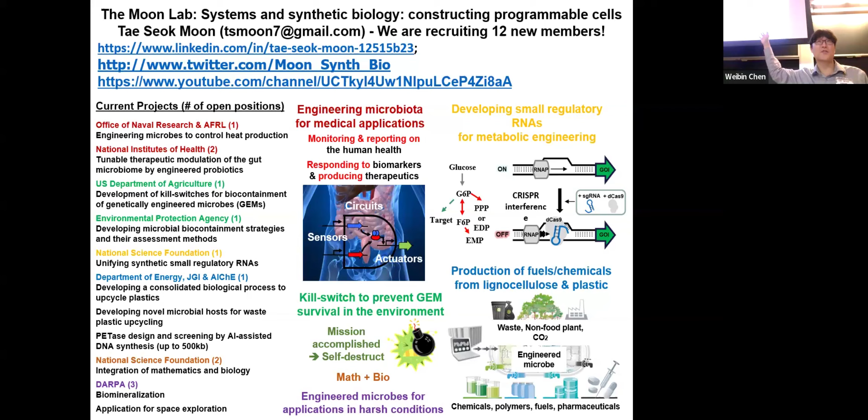So let me start with the serious talk. Even if you are not interested in the biology, you're probably interested in the global problem, including the climate crisis, energy problem, also pollution, etc. I'm very passionate about this problem, especially the global problem related to the climate. And I hate this guy because this is a waste, especially the plastic waste. That's a huge problem in the world.

But this actually saved my life because I talked about earlier my trip, more than 190 days a year, and without this one, I cannot survive. So I always have this empty bottle, fill it up with new water anywhere in the fountain. This is not actually recycled all the time. I cannot travel, but still the problem is too many bottles in the world produced every single day.

And what I want to do is, rather than using other methods, there are multiple different methods to tackle this problem, but I want to use a biological method using what I call magic bacteria that uptake whatever waste, including plastic or CO2, and also plant-based agricultural waste, into high-value chemicals. Today we do all kinds of different research, including CO2 reduction, also biomass, including agricultural waste or plant waste. But today I focus on the plastic waste because that's what I started the company based on, this technology.

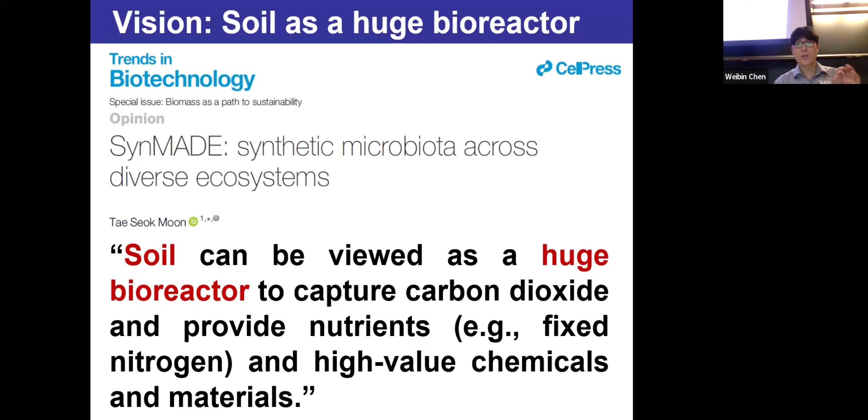So to make that happen, we need to have some tools. First I want to introduce this, especially for people interested in biology. Before, when we studied biology or a single microbe, what we did was basically delete one gene at a time and then understand the function of that gene. That's how we understand all the genes we have.

If you're not that into drinking alcohol, probably you don't have alcohol dehydrogenase, a key enzyme for breaking down the alcohol in beer or wine. The way we know is we basically delete that gene and then see you don't have any metabolism of alcohol. That's pretty much what we've done, but that's at a single cell or single strain level.

But can we do the same thing at the entire microbiota or microbial community level? Now we have a tool using the so-called CRISPR system. Basically you can use that as a targeted killer, meaning in an entire soil system or water system, you now have the method, approach, or tool to target only one bacterium in the community and kill only that one bacterium, then see the function of that bacterium in the society, in the community.

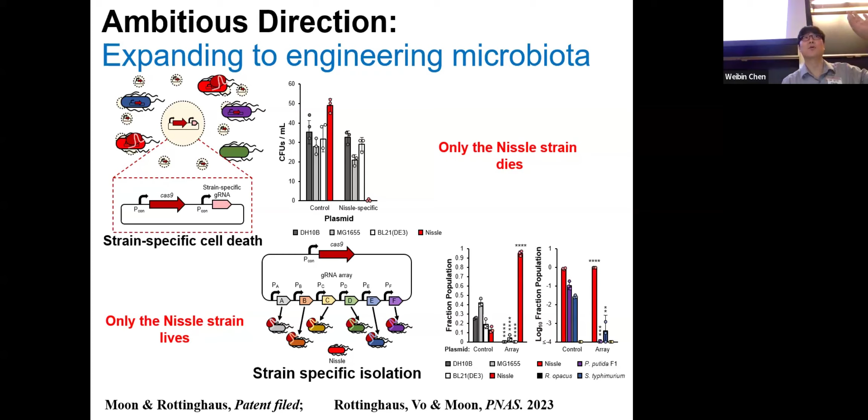So that is actually something we published recently, and we've kind of expanded the idea. Now we're using that technology on real samples—I'm talking about real soil, real water, etc.

So speaking about plastic, I have probably only 7 minutes, I guess, so I'll speed up. Basically this was my idea when I was traveling, and that was my shoe.

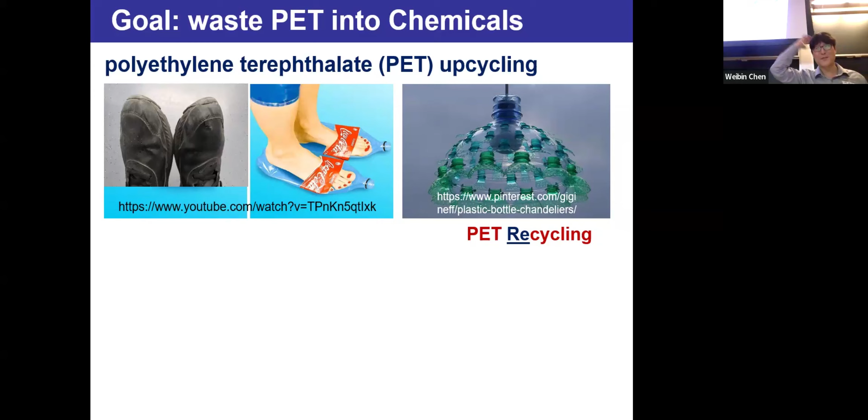After 71 days of non-stop travel—I'm seriously talking about 71 days without coming home, traveling to give 25 seminars 2 years ago—I found many holes in my shoe. I realized I probably wanted to recycle plastic to make my shoe at the time, but this is my joke slide; nobody laughed, unfortunately.

Anyway, so my project is basically not about recycling, but about upcycling. Upcycling means using waste and making high value out of it. As you can see, this waste probably costs very little, but it still costs some money.

But we are talking now not only about polyethylene terephthalate, PET, but we now have the technology to convert a mixture of PET, polyethylene, polypropylene, polystyrene—a mixture. The most important key technology that triggered me to start a company is that it doesn't matter, regardless of the composition of your plastic waste. Now we have the chemical method to convert that into smaller molecules, basically breaking it down, and then I have two magic bacteria converting it.

In terms of data, 100% consumption of the breakdown compound. But my lawyer said don't say 100%, even though your data shows 100%, you should say almost 100% because that's the legally correct term. So basically now, regardless of the composition of the original waste, we have technology that converts it into a high value chemical at the end of the process. This is very important because my plastic waste is different from your plastic waste composition—today's composition is different from tomorrow's. Because of that, we've solved the problem of heterogeneous feedstock, the inconsistency problem.

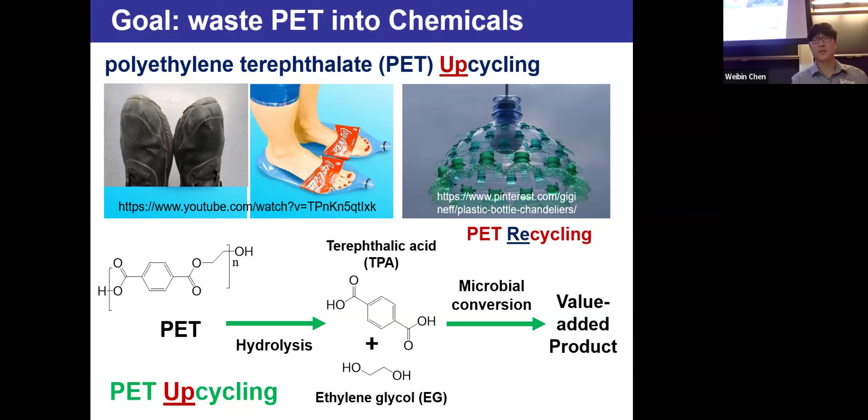So because of time, I'll move up very quickly. So I chose one chemical—a carotenoid.

There's one company doing a very nice job scaling up, making PET out of PET waste. This is a French company using enzymes to break down PET into monomers. This is not mixed plastic, only PET. They convert it into the monomers of PET, TPA and EG, then purify and repolymerize using chemical methods to make PET again. This is a very important recycling technology, and it's a huge market, as you can imagine.

But the only problem I see is the cost of this process—about $2 per kilogram. I checked with a company employee, and based on my techno-economic analysis, this entire process should be at least $2 per kilogram. How do you survive when the current PET price is only $1 per kilogram or less? The employee said, off the record, my calculation is right, but the way they survive is the French government giving a lot of money to the company. So this is a huge market, but economically it's not going to work. I want them to succeed, but it's not economically viable.

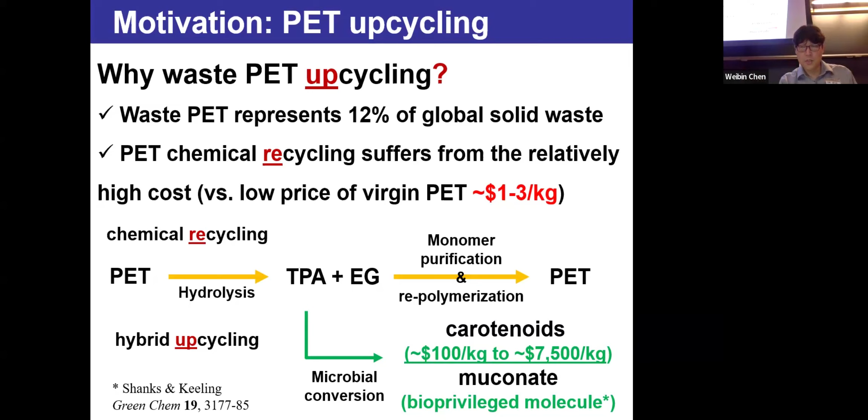So I want to completely disrupt this ecosystem by developing these compounds using plastic waste to make high-value chemicals, including lycopene. This is my concept—you don't need to worry about all the details since that's not your interest. The main idea is we now have the technology, as I mentioned, to convert plastic into high-value chemicals. Actually that should be shown in red, but the picture isn't delivering the right color.

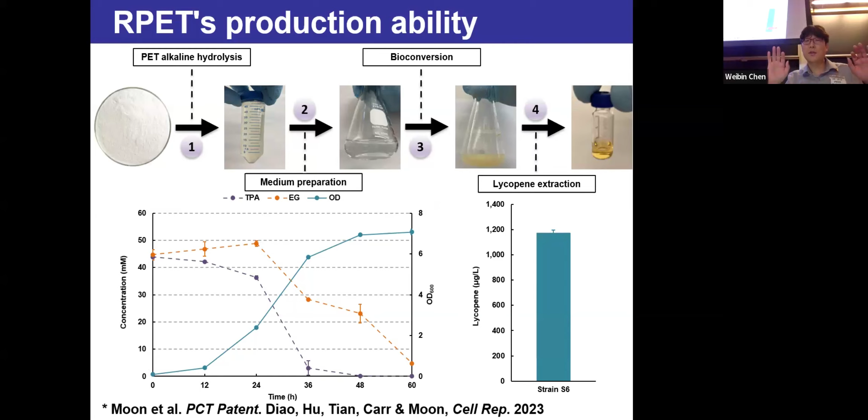The current titer used to be around 1,000 micrograms per liter. After multiple rounds of metabolic engineering, we now have around 20,000 micrograms per liter. That sounds like a lot, but unfortunately it's not commercially viable yet. This should be at least at the gram per liter scale to consider scale-up. We started from the microgram per liter scale all the way to 20,000 micrograms per liter—a 20,000-fold increase over a couple of years. I believe in three more years that will become 1 gram per liter.

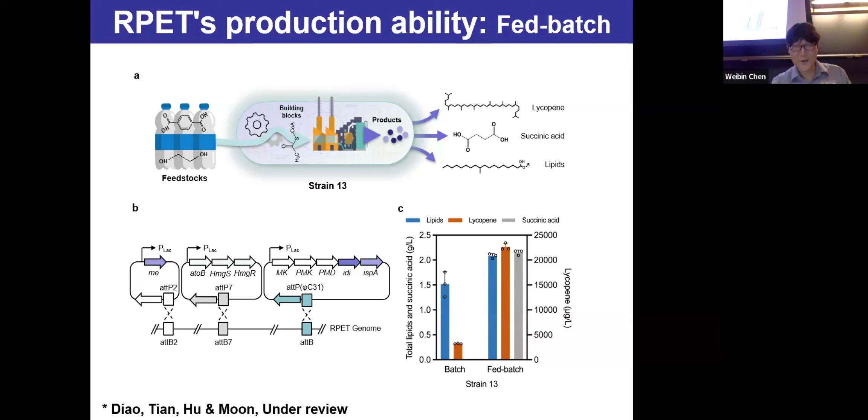If that happens, I'll sell my technology to a company, retire, get a mansion in California, drink a cocktail, watch the sunset, and be done with my career, I guess. Hopefully that happens—that's why my wife is so excited. I'm talking about California, right?

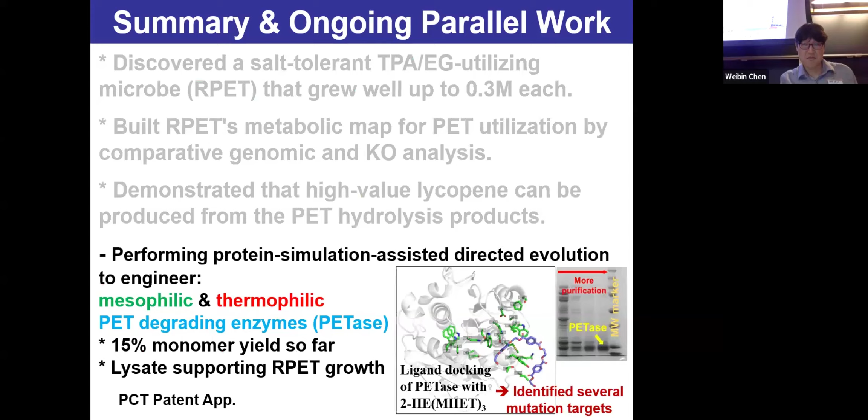Also, I want to talk about how I almost died for many years because of multiple reasons, including a policeman who beat me almost to death. I'm serious—that was sent by the dean of the school, Washington University. And then I survived. I realized I needed to do something for the community because I survived this kind of discrimination, harassment, and retaliation twice.

So three years ago I started a webinar series only featuring young speakers, untenured professors, or postdocs, giving them 45 minutes. But I realized nobody would watch that seminar series. So I invited big names, including Nobel Prize winner Frances Arnold, my academic grandma, and now 21 National Academy members, and also 23 funding agency directors.

I never thought about how many journals we have in my field—20 chief editors already joined as 5-minute speakers, as pioneers, and then 9 Nature and Cell journal editors, and as I mentioned, selected 165 rising stars. After 3 years of weekly webinars, I realized we need to gather together.

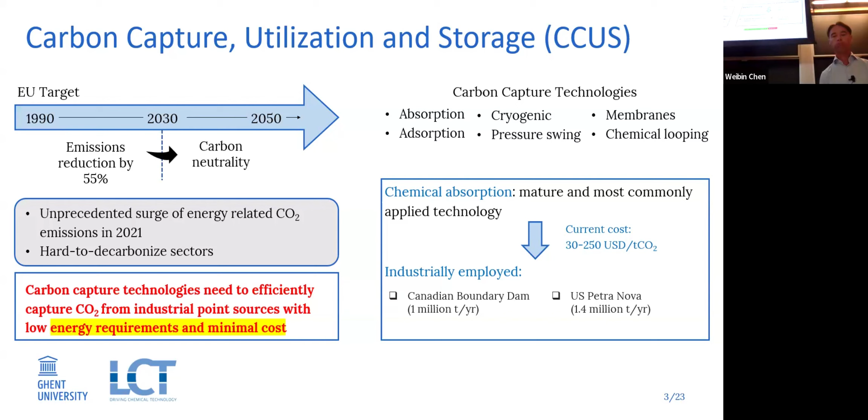Of course, you have different types of technologies. You have absorption-based, cryogenic, membranes, and so on. But people for point sources mostly look at chemical absorption as being the dominating technology.

How does that work? Well, you start with flue gases here on the left. You have some cleanup, and then they are sent to an absorption tower. In this absorption tower, we have an amine typically, a solvent in water that is basically trapping the CO2. This means you end up with a concentrated amine, which needs to be stripped. So here the CO2 needs to be removed, and that's done via heat primarily.

So the big energy consumer here is this reboiler. And in the end, if you look at the OPEX, it's mostly determined by this part. You see 70 to 80% of the OPEX is this reboiler duty. So if you can bring this reboiler duty down, then everything else makes sense.

On the other hand, from a CapEx point of view, these absorption and desorption towers are huge. It's like with everything in the chemical industry, you pay for steel. The larger it is, the more steel that you need, the higher the cost. So if we can make these things smaller, the cost will go down.

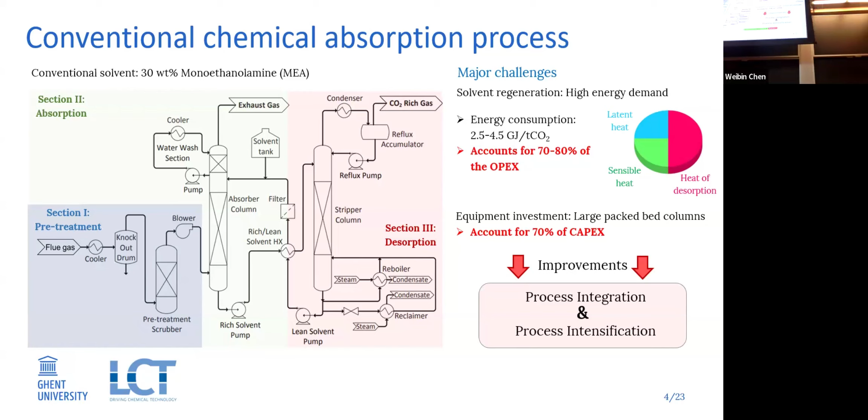There are a lot of definitions of process intensification, but I like this one of Professor Stankiewicz, one of the pioneers in process intensification: it's a chemical engineering development that leads to a substantially smaller, cleaner, and more energy efficient technology. In the end, doing less with more.

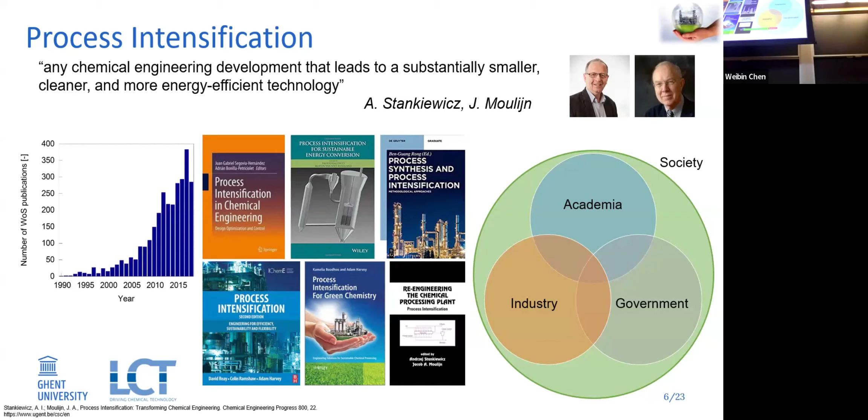See that you're not awake, it's more with less.

Good morning. So here you see our vortex technology. This is the first generation. It looks a bit like an octopus, and it was originally developed for gas solid kind of systems.

This is cold flow, just looking at the flow. Here you can actually heat things. This is for reactive purposes. We use it for biomass conversion and for catalytic processes.

With the solid, you really see the solid particles rotating very quickly because you have small openings in the sides, and here comes the gas in a tangential way, and it basically drives the rotation. So you see the gas flowing, and it's divided over these slits that you see here. In this way, you get this rotational movement, and then everything leaves over the exit.

So the main feature is that you get an intensification of heat and mass transfer. And the good thing is also you have no mechanical rotation. This is from a cost point of view, makes it easier, but also makes it more robust. And this is what we mean with process intensification.

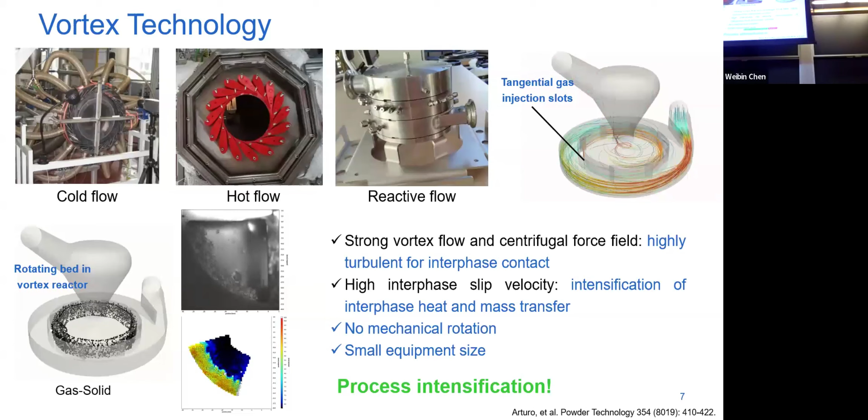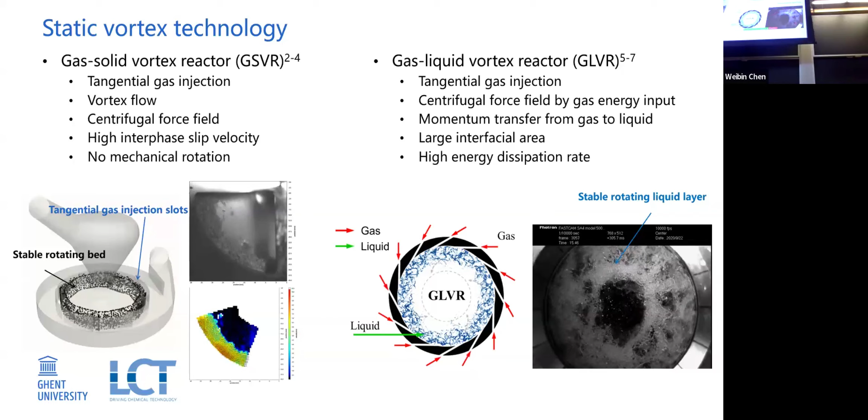So again, tangential inlet of the gas - these are the red arrows. The liquid is entered in the center, and is divided. And what you see - these are camera pictures - is you really get a very large interfacial area. So very high energy dissipation and very good momentum transfer. And this is, of course, excellent for absorption, but also for desorption.

And so over the years, we have developed this thing further. We see very high turbulent flow, intensification of the mass transfer. And again, we can avoid this mechanical rotation. We have optimized the design based on CFD - we did computational fluid dynamic studies to optimize the initial structure, and we have really very small equipment.

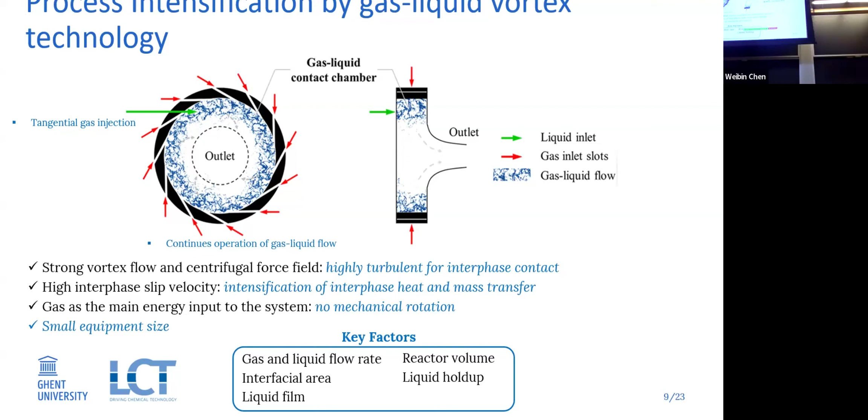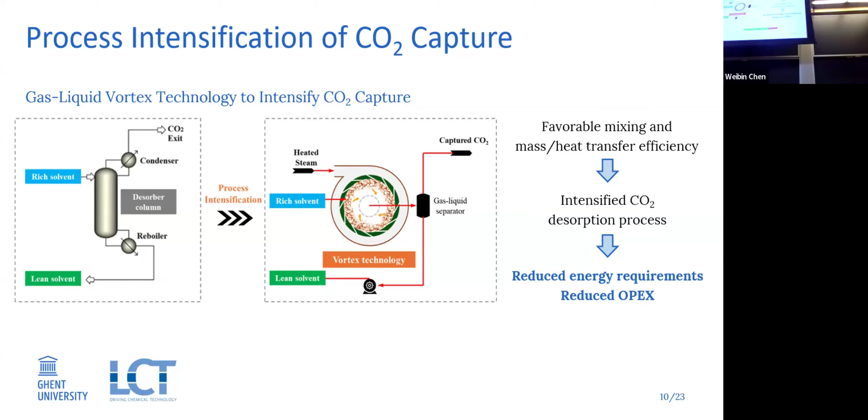But again, the crucial step is not so much the absorption, but really the desorption. So we have here our classical desorber, and here we have the vortex desorber. We have the solvent, the rich solvent which is entering, the steam needed for stripping the CO2, a gas liquid separator. Captured CO2 goes to the right, and here we have the lean solvent. So again, what we want to prove is really this reduced energy requirement, because this will reduce the OpEx.

So we studied this experimentally. It's nice to study things computationally too. So what we did is we have here our rich solvent, it's fat. We have a coriolis flow meter. We 3D printed a gas liquid vortex reactor. We put it in an environment with detectors, two types of detectors to double check our results, liquid samplers, but also infrared gas analyzers, really to be sure that we can measure the CO2 concentration at the outlet properly. And then, of course, we have our lean solvent, which is lean as well.

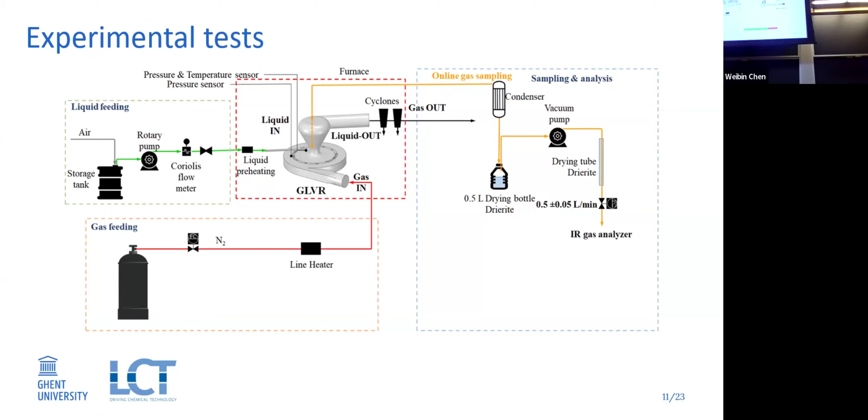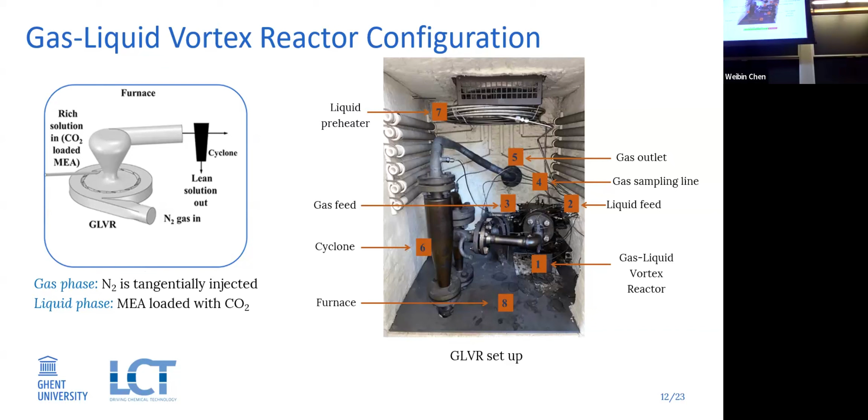In this small unit, we use a gas flow rate of 15 to 25 normal cubic meters per hour, and a liquid flow rate of 10 to 40 kilograms per hour. So with a device like this, you have this kind of high flow rates, and from that point of view, you really show the intensification potential.

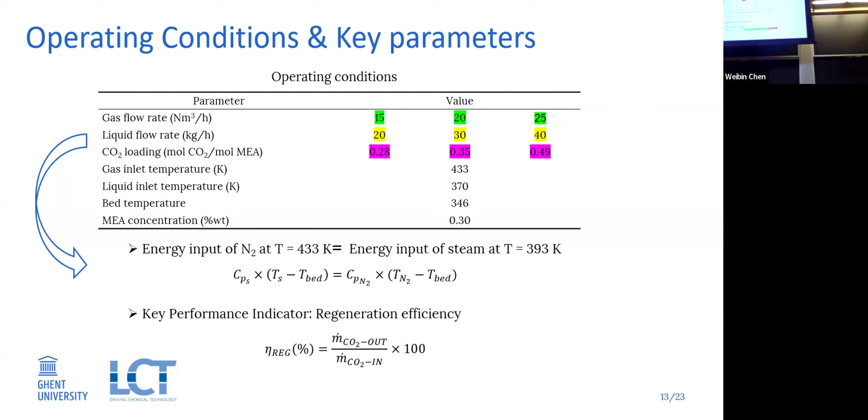We calculated energy input. Another performance index is, of course, our regeneration efficiency. This is in effect how much CO2 comes out versus how much CO2 we actually put into the liquid. So we want to, ideally, have 100% of the CO2 which is in the rich amine leaving. This, of course, is not always the case, it depends on the design.

So here you see the results of these liquid and gas flow rates with the same geometry, always kept the same. You see that we see a substantial influence of this gas and liquid flow rate. We see that for a constant gas flow rate, the regeneration efficiency increases with decreasing liquid flow rate. The energy input would remain the same, but the liquid holdup increases, so it's obvious that this becomes better. At best, we have a high regeneration efficiency of 74%.

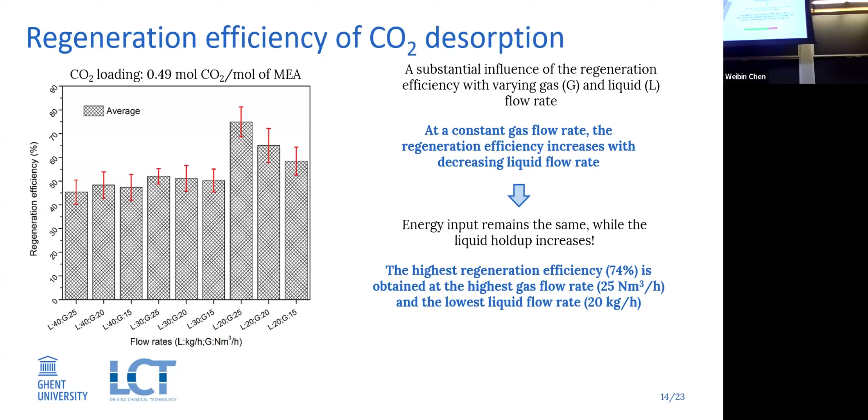So this is a very nice, decent value, also considering that we did not optimize the desorber design. We just used something that we had available.

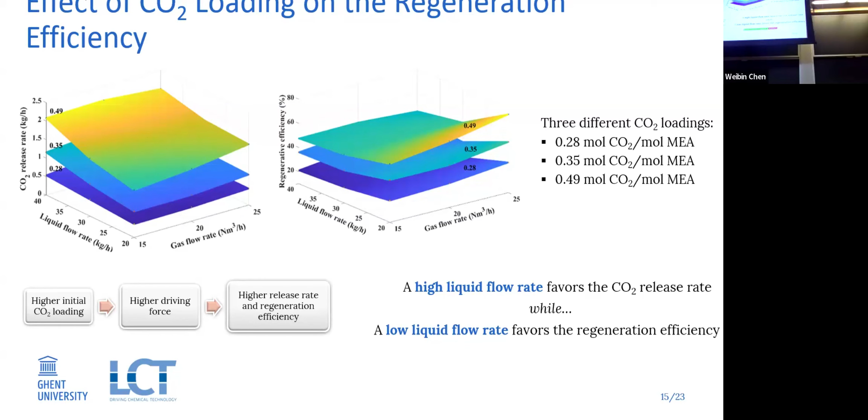So this shows potential. If you look at the three different CO2 loadings that we studied, then of course, if you have a higher initial loading, you have a higher driving force, and we have a higher release rate. So we go up in this direction. At a high liquid flow rate, this direction favors CO2 release rate, while a low liquid flow rate favors regeneration efficiency. So we have a bit of an optimization target that we can play with.

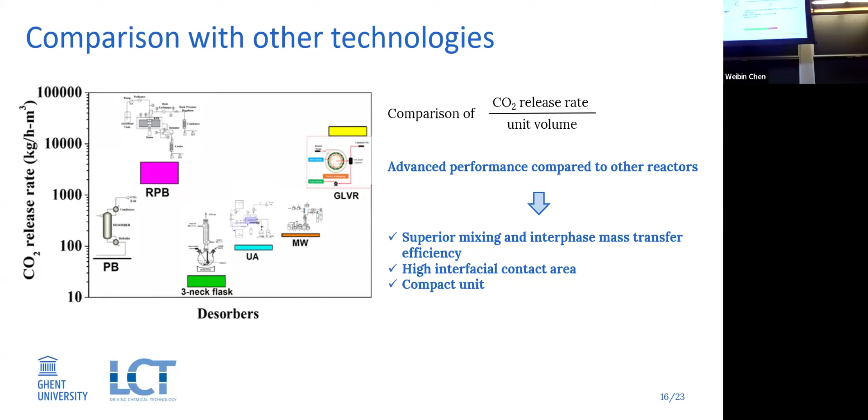And of course, then you get interest from companies and so on. So this is where we are today, a lot of interest from companies. And now we have to demonstrate this combination of absorber and desorber on a larger scale, at least showing that it's also possible at the higher flow rates.

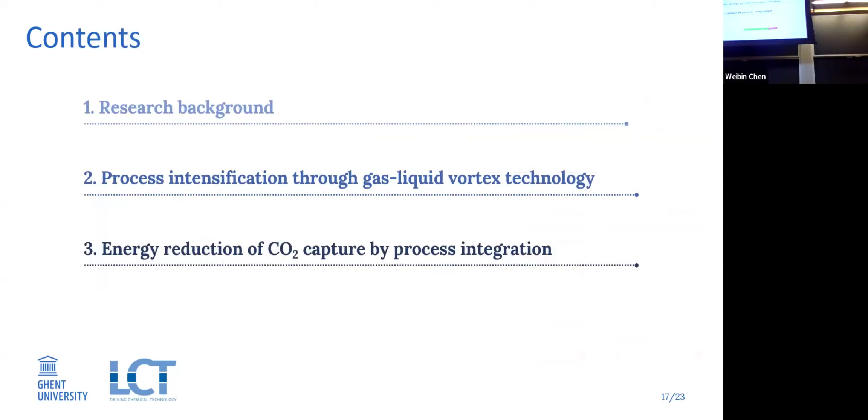But it doesn't stop there. What you can also do is not so much on this absorber-desorber, you can also play with the process scheme. So a classical process scheme of an absorber-desorber has this heat exchanger in the middle, this reboiler and so on. You can also do clever things here to reduce capex, opex, but in the end, to reduce this reboiler duty.

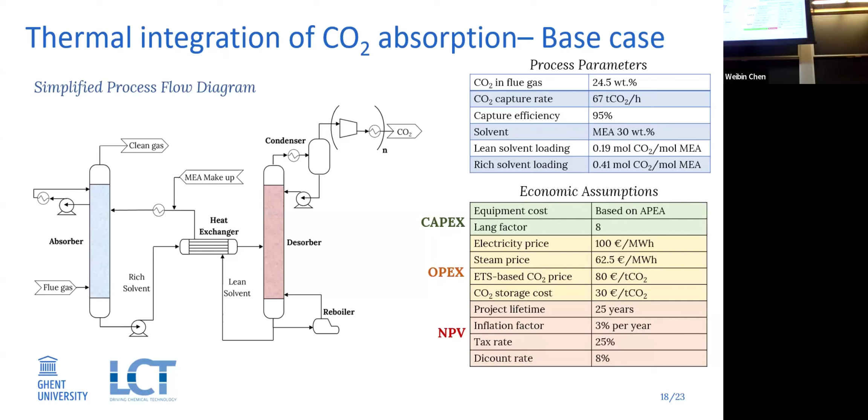We did a whole study looking at capex, opex, and NPV for a classical absorber-desorber combination with MEA, because MEA is typically the solvent that is studied best. We looked at a whole range of modifications. So the first one is this: intercooled absorber.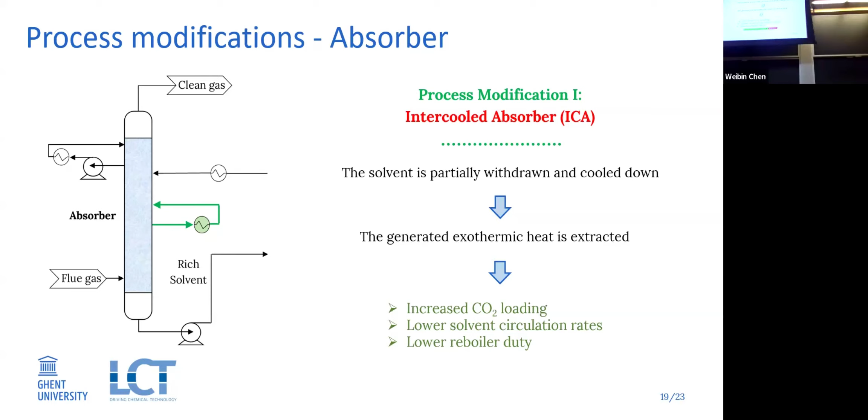Of course it costs a bit of capex, but the solvent is partially withdrawn and generated exothermic heat is extracted. This results in increased CO2 load, lower solvent recirculation, lower reboiler duty. This is always our objective. This is the first thing we studied.

The second thing we studied is rich solvent splitting. So we split the solvent partially, send it to the heat exchanger, but also to the top. The cold stream is fed to the top, reducing reboiler duty.

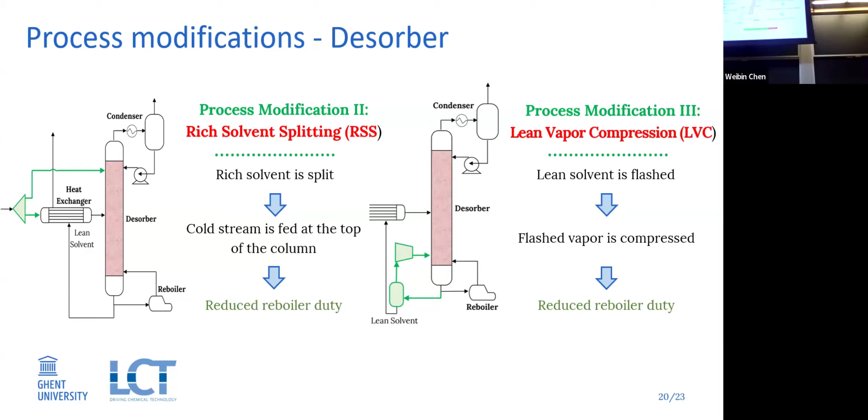The third one that we studied is lean vapor compression. So we have a lean vapor, solvent is flashed, vapor is compressed, reducing reboiler duty.

The fourth one is rich vapor compression. Rich solvent is in this case flashed, vapor is compressed, reducing reboiler duty.

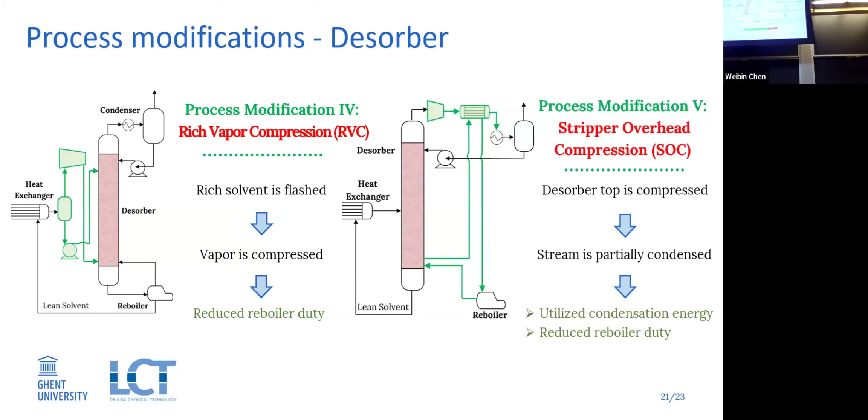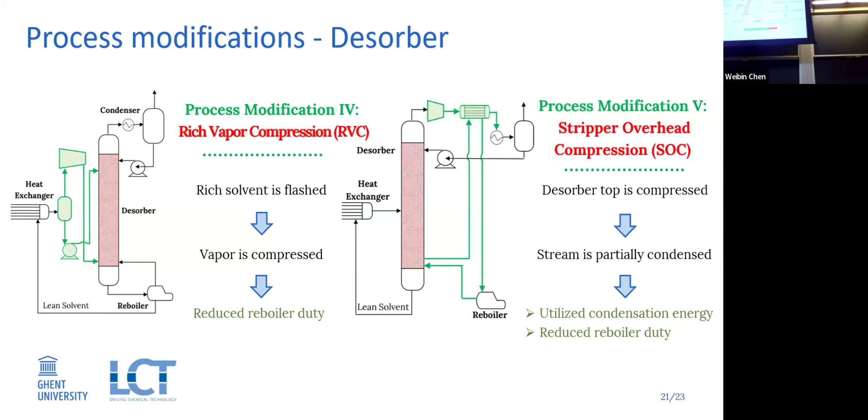Then the last one, stripper overhead compression. Desorber top is compressed, the stream is partially condensed with less condensing energy, and we reduce reboiler duty. So all these things are possible, but they all require a bit of investment.

But what you can see is that they have a substantial influence on reboiler and condenser duty. This is the base case, and you see that especially this lean vapor compression can result in a 21% reduction of reboiler duty. You also see that intercooled absorber gives about 9%.

You also see that sometimes this will result in a bit more electricity use, which is why you also have to look at OPEX and CAPEX. You see that in the end, for the LVC, this still results in a lower OPEX. Nevertheless, there's a CAPEX cost for this.

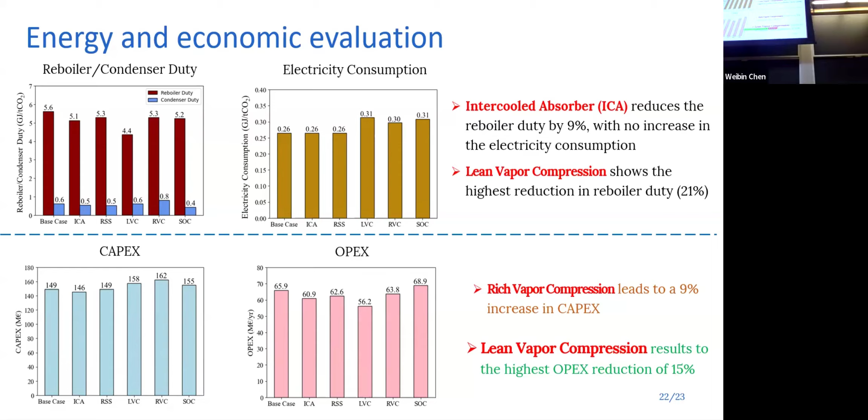So you see that all these different changes in the process can really help to substantially decrease the OPEX. What's nice is that they are additive — you can combine them.

And then the result becomes even a lot better. We will publish the results soon, so I cannot fully share them, but it's really impressive what you can do with this combination.

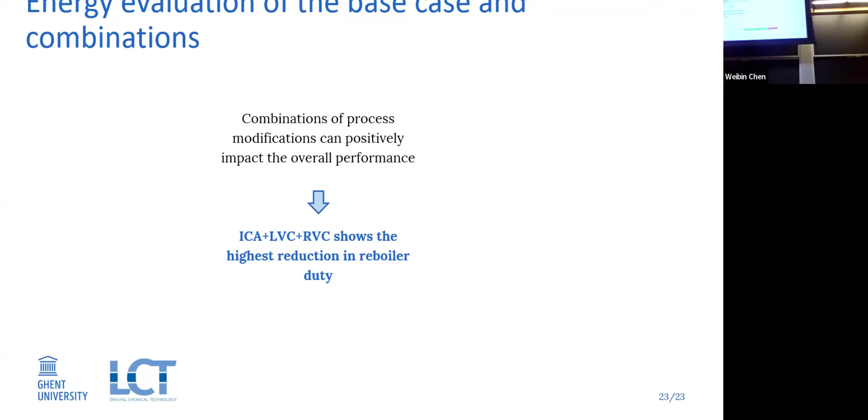This combination of three really has superior performance, and this is actually what we're going to demonstrate. We're building now a unit, with an investment of around 2 million euros — using a vortex absorber, vortex desorber, rich solvent splitting, rich vapor compression, and lean vapor compression.

Based on our calculations, we end up with 1.7 gigajoules per ton of CO2 energy consumption. If you compare to the best published and proven technology from BASF, that's 2.5. So we're basically 30 to 40% lower than that. That's pretty enormous, and of course it also depends on the solvent.

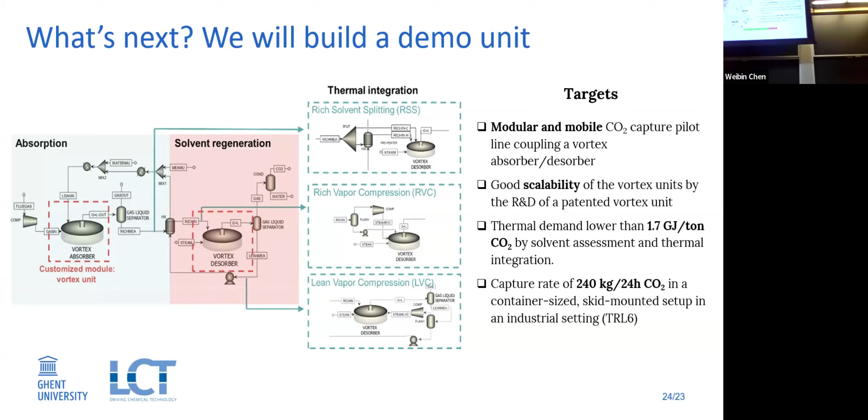So we will test plenty of solvents. Numerous companies are involved — ExxonMobil, Dow, and so on — because this can really be a major thing. We will not go for a small scale unit; we really go for a kilogram per day unit, also to show scalability. We will even demonstrate it on site at ArcelorMittal, one of the biggest steel producers in the world, to couple it to their chimneys.

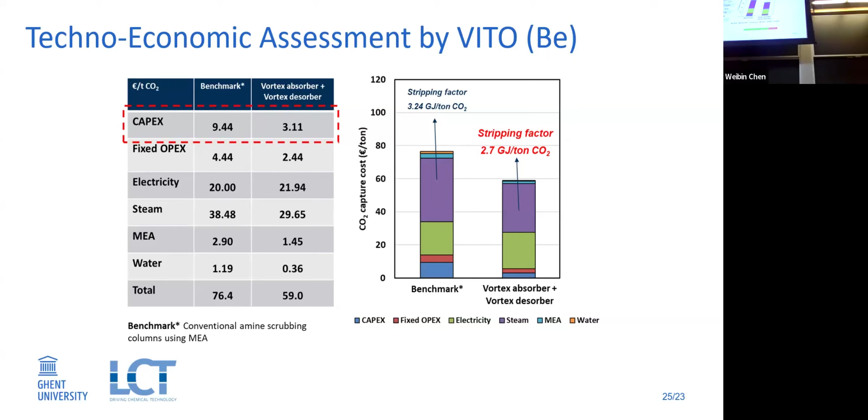So, the vortex absorber-desorber, I think, has enormous potential for CO2 capture. This thermal integration allows further decrease of the reboiler duty, which is essential for OPEX, but demonstration is needed to really assess the potential of this at higher scale.